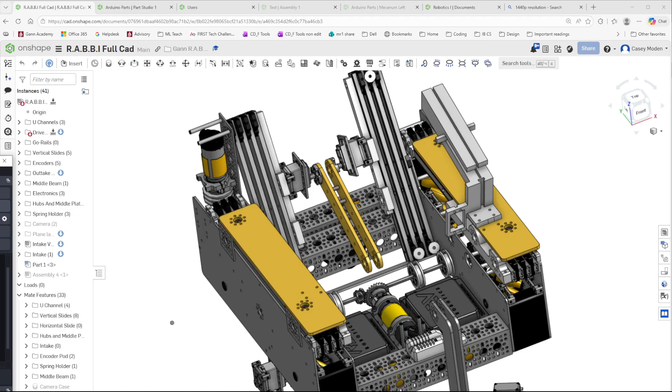Hey everybody, in this video we're going to go over how to use OnShape. OnShape is a CAD software, computer-aided design, very similar to Fusion 360, but it's used a lot in robotics, particularly FTC robotics, because it's really easy to collaborate and make parts that put together existing parts and then make our own custom parts.

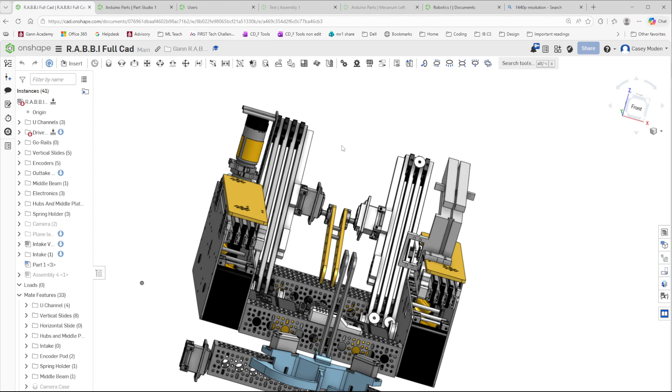So this is an example of a robot, the R.A.B.B.I robot from Gann, from about 2 seasons ago, so probably like 2024, 2025. This thing is entirely built by students.

What's really cool about OnShape is, one, it's just really fun. If you like Legos, it's like an online Lego builder kind of thing. You can put existing parts together, but you can also make your own custom parts that fit with existing parts.

So you might have parts that already exist that you want to kind of put together. Great, we can do that, and then we can also add in our own parts.

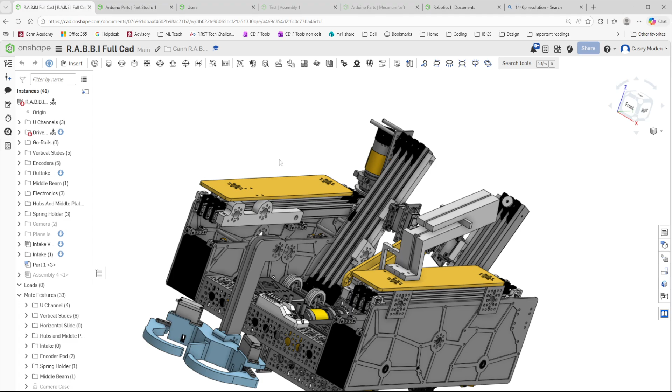If we look at this build, there's some parts that come from a manufacturer called goBILDA, so they sell a lot of robotics parts. Like this cool looking hole pattern here is from goBILDA, and that part, we love that part. It's a great cross piece. It helps us hide some motors away.

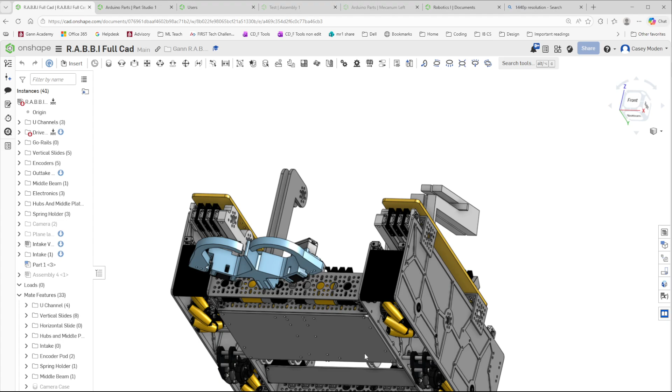But what we really want to do is also make some other parts that are unique to our robot and work specifically with where these wheels are going to be located, and other parts we want to include in the robot. It's just hard to use only goBILDA parts. So you can include those parts, but then also make your own parts that will fit with them.

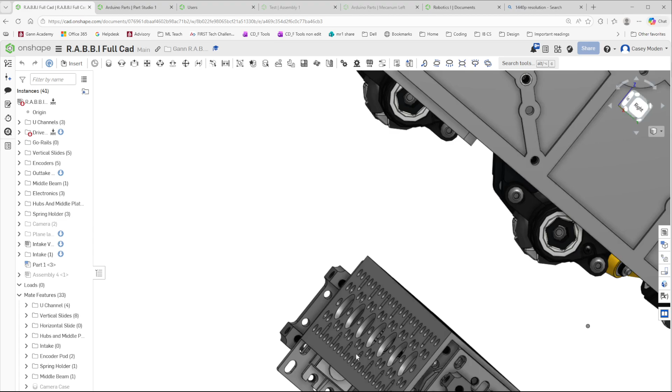If you look at a part like this, maybe we can zoom in on this part right here. You can see it's got some unique holes, and we want to utilize those holes to help us attach our parts together. So if we look in here, we have these different plates, and we want this plate to be uniquely designed, specifically designed to fit in with this part.

This piece right here will probably be custom designed. It could be 3D printed, laser cut, or cut out of metal. This one was laser cut out of wood and then later CNC'd out of metal.

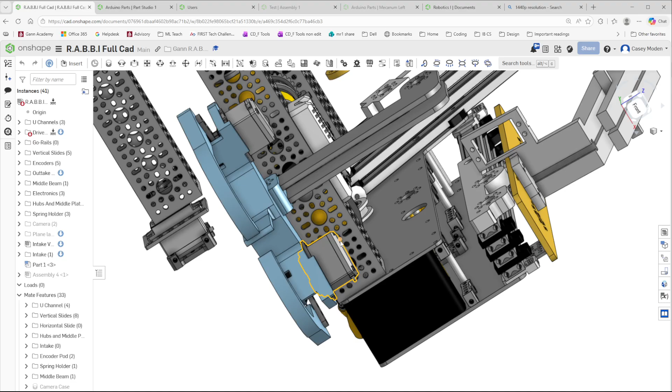We want to make sure that our robot is fully planned out in advance, and that we're very careful about putting these holes in places that are going to meet up with existing parts. Okay, so for our class, we are going to do something a little bit different.

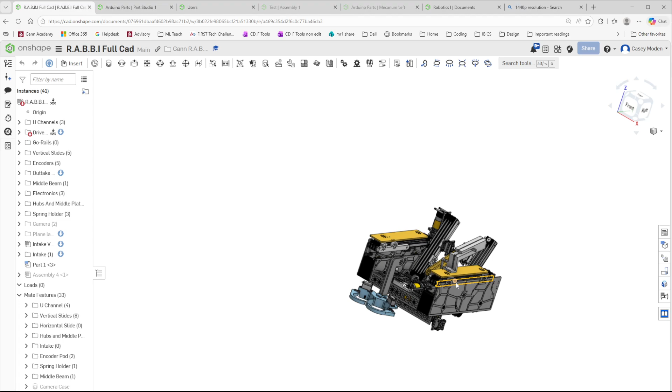Since we're not designing this full robot, we are going to design out our own version of a robot, and then build some custom pieces on it. So we'll assemble some existing parts, which I think is really fun - I always find it fun to get back into and put things together. And then we're going to make our own custom pieces that integrate with the parts I made.

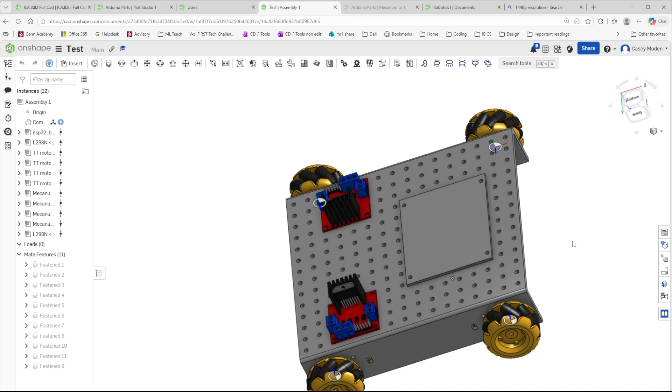So we're going to build this, and walk through the steps of doing that over hopefully just a couple videos here. My goal with this first video is really to explain what OnShape does, how we can get some parts on there, and maybe start doing a little bit of assembly, or I'll probably split that into the second video.

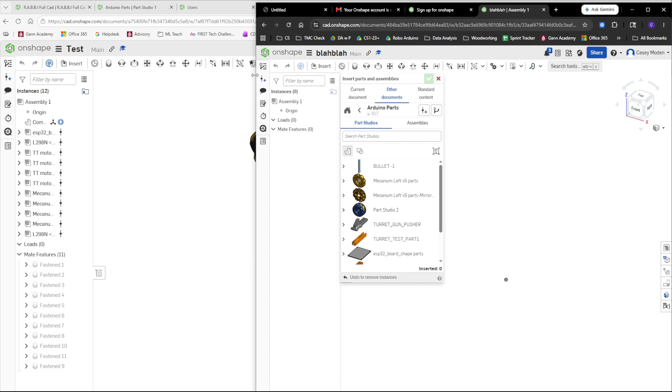So let's open up a new tab. Actually, I'm going to close this out. We're just going to open up OnShape. Okay, so this is my student account here. Alright, so we're going to go to OnShape. I think I should be already signed in, so I'm not sure what's going on there. But great, we're going to be in here, and we are going to create - you should just see Robotics 1 in yours.

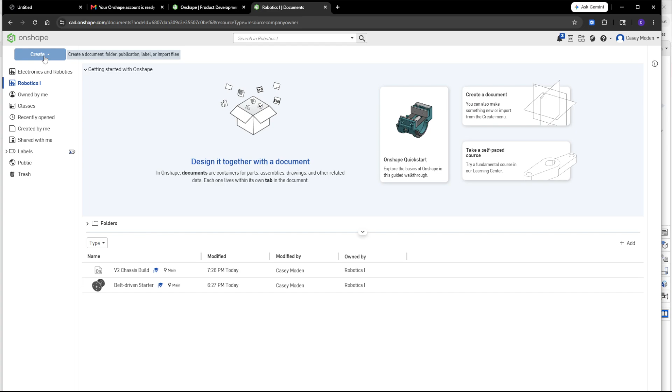You should be invited to it, although yours might look a little bit different. We're going to say Create Document. This is going to be our Arduino robot build. I'm going to put it in my home - I think you can put it in the Robotics 1 folder. Let's just put it in Owned by Me for now. I'll have to think about how to get this shared out and visible to everybody, so I'll think that through a little more, but we'll get started with this.

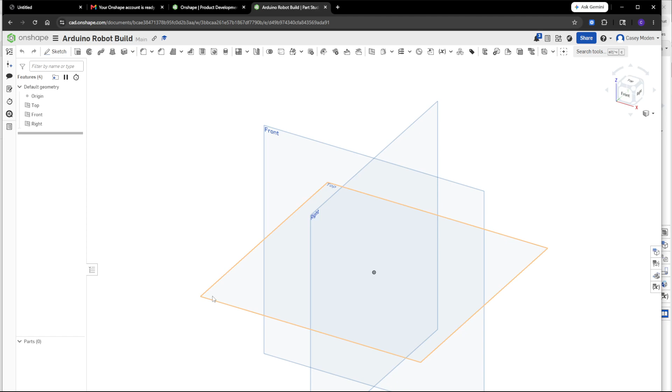Okay, so this is a little bit zoomed out. Let me try and zoom in a little bit so we can see more of this. I want to make sure this is on screen - there we go, that's better. Because what I really want to focus on is down here, these 2 tabs.

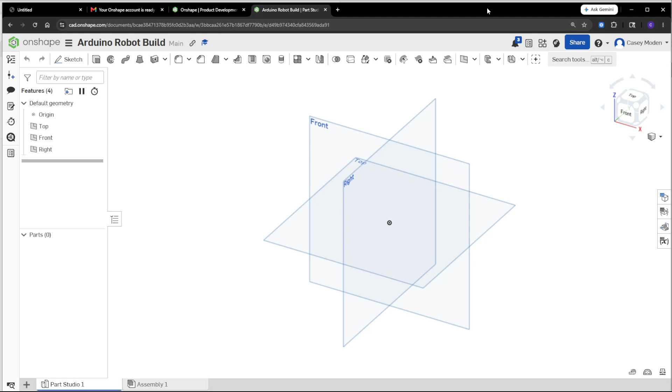The 2 tabs are key to understanding OnShape and how it's different from Fusion. Although actually Fusion is trying to get a little bit closer to OnShape now with some of its recent moves and making hybrid designs. So if you use Fusion, you might see something that resembles this now.

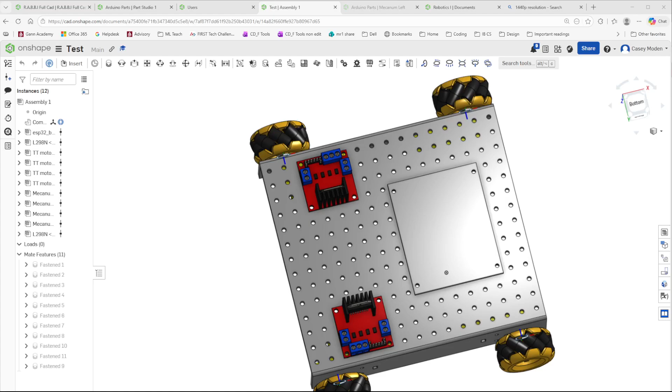The main point here is that we have two distinct kinds of approaches to looking at things in OnShape: there's the Part Studio, and then there's the assembly. The Part Studio is, like if we look at this robot here, the R.A.B.B.I Full CAD, this is an assembly. There's a whole bunch of individual little parts that we might build out in isolation, and then we can put them together. So we designed them individually in a Part Studio, and then we figured out how these parts are going to fit all together inside of an assembly.

That's what I think is really unique and very cool about OnShape, and a lot of fun: pulling in parts, putting them together, finding existing parts, and then also going through and making my own custom parts.

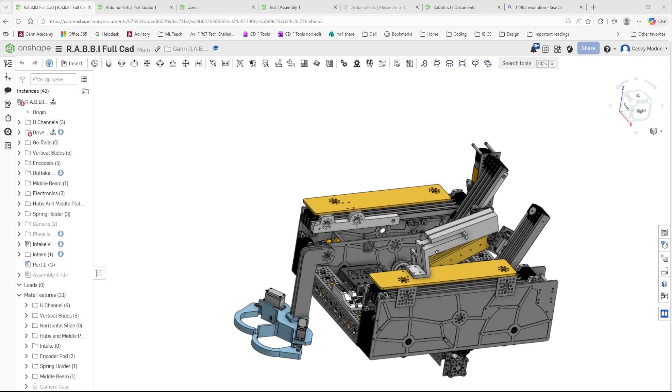What's really cool is you can make parts that pull information off of these existing pieces. So that's what I'm going to try and show you how to do: pull in parts and then reference those geometries, those hole locations, sizes, all that stuff in our new design, so that we can make parts that are going to fit with existing pre-made parts.

We're going to go through, and ultimately my goal is to build out the robot that we already have in class. So let's just go through it. We have a Part Studio and we have an assembly.

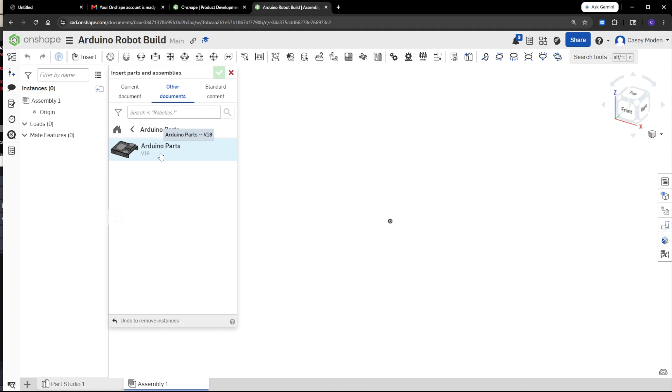We're going to go into an assembly, and we're going to hit insert, and say other documents. So we can find some other existing documents, and we're going to look for, I think it's going to be in Robotics 1, Arduino Parts, and we're going to see Arduino Parts version 18. You can see in here there's going to be a bunch of Part Studios, and there's also going to be assemblies. Always do the assemblies if you can. Part Studios tend to be a little bit messier, and they are more kind of separated out.

So what I want to do is pull in some parts into my workspace. I have just this very limited number of parts. I kind of curated these parts. If we were to look at other libraries, there might be hundreds of pieces, but I've just pulled out these ones for our robot for right now.

So what we're going to do is grab all the parts that we need, and put them into our document, and in the next video we'll start putting them together. So I'm going to grab, I need all this stuff. I need an L298, that's our motor driver. I'm going to need two of those.

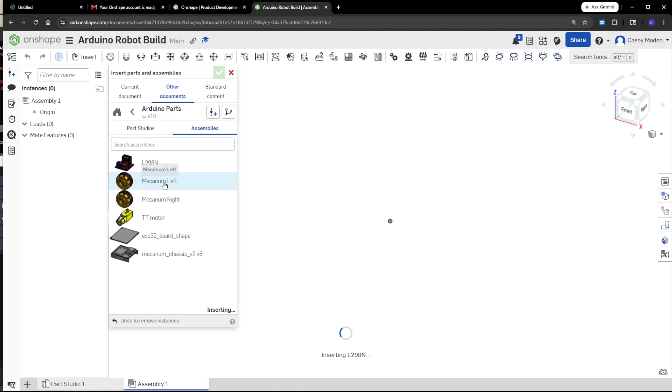These are each one of our wheels. Notice there's left and right, so we need two of those. Motors, I need four of those. So I'm going to pull in one of these. Actually, I'm just going to pull in one at a time, and then we'll do a little bit of copying, and then we'll move on into the next video. So let's just grab, but make sure we do grab a left and a right. We're going to grab a TT motor.

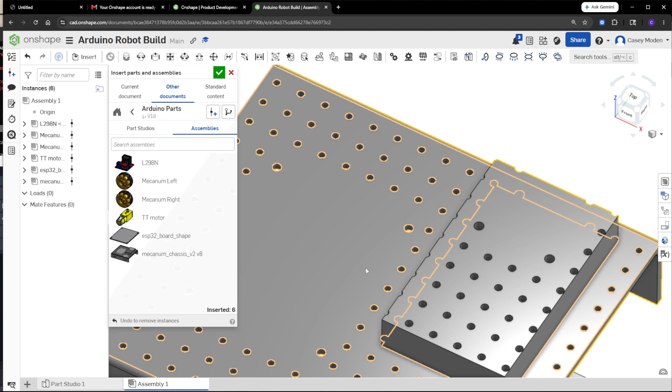This is my board, and this is my chassis. Oh, my chassis is a little bit messed up. I'm going to go change that version real quick to clean that up a little bit. So it's actually kind of cool, I'm going to leave this in.

We're going to hit, I put all the parts in here. I'm going to show you what I'm going to do with this part in just a second. But I have all these parts in here. Now you got to make sure, if you hit exit, if you hit X or anything else, the parts look like they're in there, but as soon as you hit X, they're going to disappear. So we're going to make sure we hit check to have this in here.

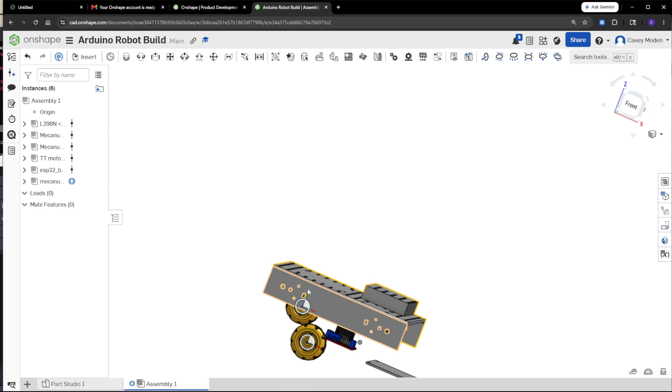Now what's kind of cool is I've designed all these parts in other instances, put all these parts together and they're in a different environment, different kind of account than this. So what I can do though, actually I realized I added this little thing on here that kind of messes up our board, right? I added that on there in one version. I need to go back and change that.

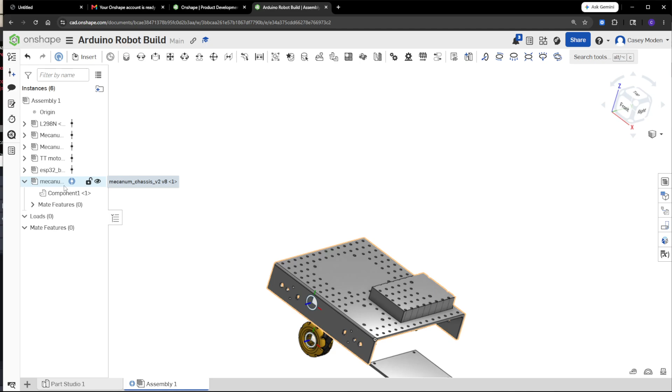I actually already changed it in a previous account, in another account, in a different version. And we can see that this thing is now saying the newer, we can now update this thing to match the other version that I made. So I kind of fixed this thing back, and I can now update it.

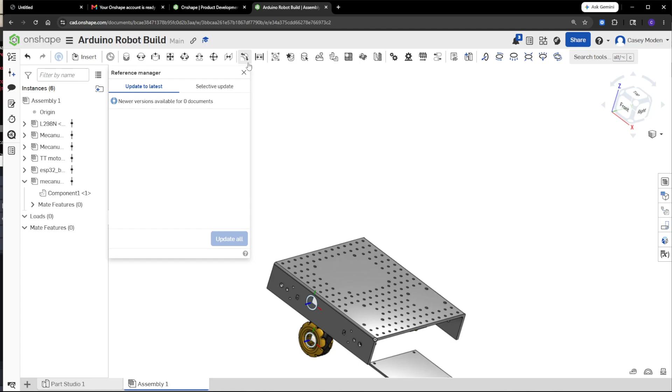It's really cool, like there are a lot of these things that are kind of like alive. I have them existing somewhere else and you're referencing them in here. If I make any changes in one document, it's going to get affected in this one. That's part of the cool thing of OnShape, is that these things are all kind of connected and alive, and we can modify them and change them and put them together in really cool ways. So I'm going to stop this for video 1 and we'll move into video 2.